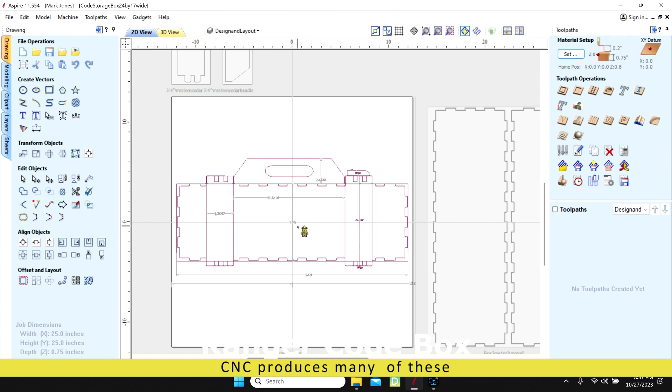I'm making a box to house some signs that I'm making for our Ranger code. This is the sides of the box. These are the ends of the box. I'll make two of these, which will give me the four sides.

They're both, each one's a little bit different, and then these two ends are the same. I could have just duplicated it, but I'll basically cut that twice and then cut this once, and that will give me all six sides to my box.

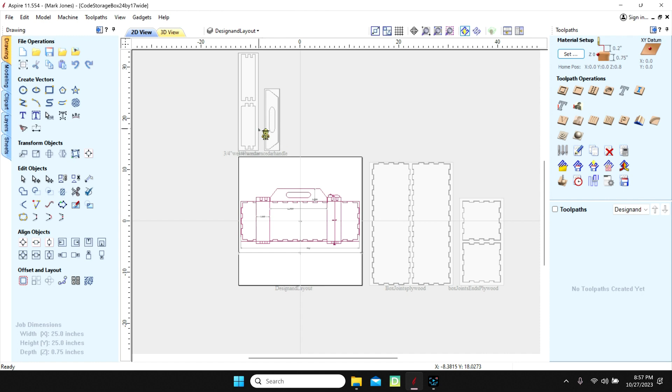This is the handle up here, and then these are the skids that go around the box. So we'll zoom in here a little bit on the box.

It's basically 24 inches long. The signs themselves are right at 23 inches, so that gives me about a half inch of space inside the box. And the signs are like 7¼ inches wide, so it gives me about 3/4 of an inch inside the box on that other dimension.

These are the skids. They're basically box jointed and they fit in there approximately 3 inches from the end. And then this is a handle. It's about 2.5 inches tall and it's right at 11 and just under 12 inches, about 11.5 inches long. This is made out of cedar fence pickets, and they're box jointed.

And this is a 1/4 inch plywood. It's underlayment plywood, and it's designed to be cut right here at the end after it's glued together. And these are all box joints, 1 inch box joints all the way around. So it's a pretty strong box.

Then I have two screws that come up from the bottom into the handle, and this makes the skid so that it's not sitting on the ground.

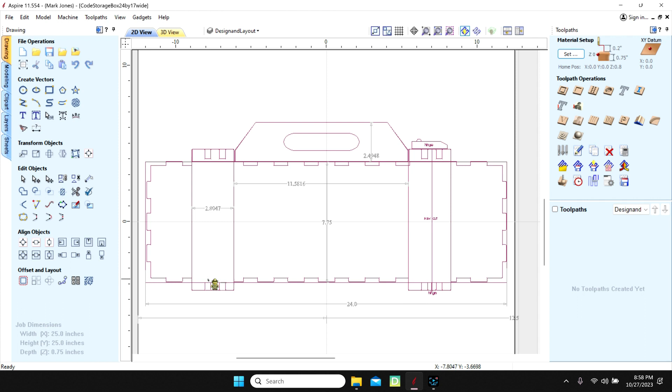And then this is a hinge in here. The hinge is so that this part goes down, and then there's a hasp at the top of it. Right up here at the top, it has a little hasp that locks the two together. And the handle's centered, so it does a good job.

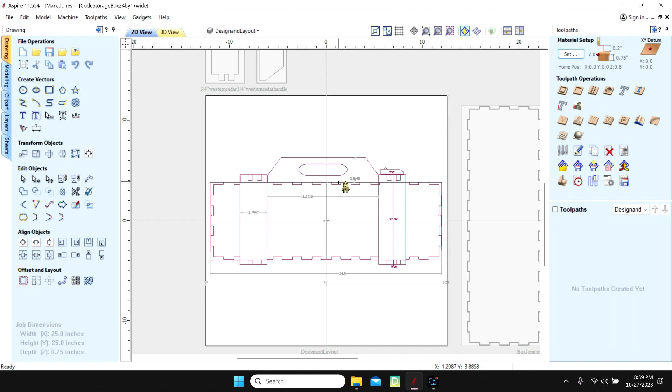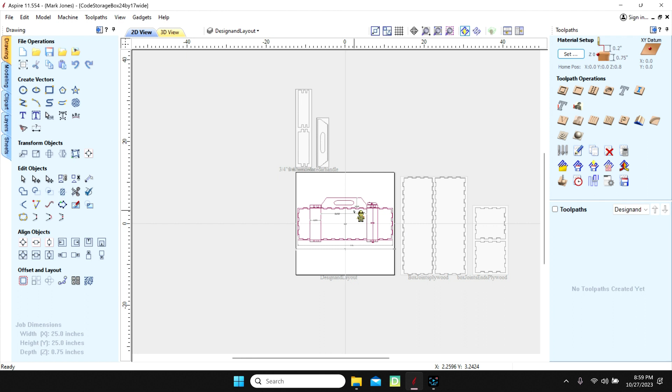I made two of these boxes now, and I've kind of taken this and set it up where I can create more of these. I do a frontiersman camping fellowship, and I have a lot of gear that's 1800 style gear. So the stakes, all kinds of different things, lanterns can go into boxes like this, and that'll keep them from getting tore up, getting gear from being broken.

Anyway, that's what we're doing with this, and having fun with it.

All right, Ranger code storage box, 24 by 17 inches wide. I've been making some Ranger code signs, and I wanted a box to store them in. And basically what I did is I used the box creator, and I had it make a box.

That created all these right here, plus a couple more. And I've learned a long time ago with the box creator, all you need is one of each, and then you can just carve it again. So that makes it easy.

Then these are the ends, which I could have just put one and carved it again twice, but it was about on the same piece of material. So that worked out fine.

Then over here, I had some skids that would wrap around this box, and they would wrap around all four sides of this. They'd be about 3 inches from the ends, and that would allow that to set up off the ground if it was wet.

And then in the middle of these skids, I would cut the end of the box off about right in here on the table saw, all the way through all four of these little box joints. And that would allow me to put hinges and a hasp on there so that the end of the box would open up. It looks kind of like a top hat.

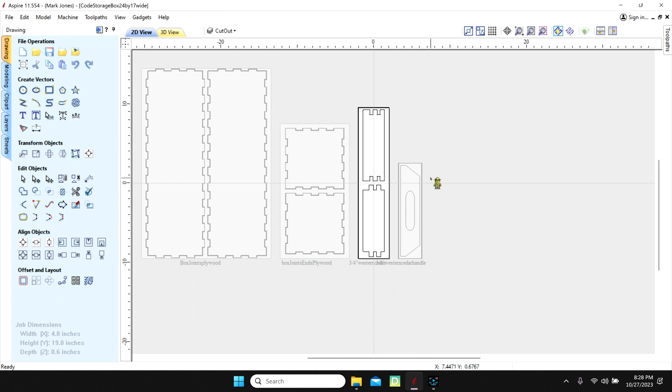And in the process I made this handle, and the handle just has the whole slot, and that all fits in there. But with my material, I created jigs out of 1/4 inch plywood to put all these pieces in so that I could reproduce them.

And the jigs, you just cut your material the width of the board right here, and then the jig's just a little bit bigger than this. What that does is that gives you where you can cut a bunch of raw boards of this size, and they just fit down inside your 1/4 inch, and then you can attach it down, but that will lock it all up so you can either flip it or whatever you want to.

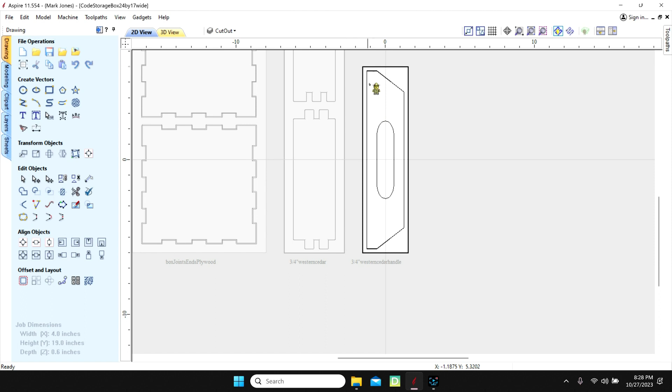So that works out real well. Same went with these box joints on this. Basically, after I did the box joint, I had to cut off the ends of it, or the little teeth that are on the bottom, and did that.

I had originally had this file tiled, where I would tile these all on about an 8-foot board. The box creator gadget was seeming to have some interference with that, especially when I added the sheets to it. Sometimes when I was doing the tool paths and using the box gadget, it would take some of the tool paths from this file right here and put them on this one, and set them over here. Either way, it would create them, so I was having some issues with that even when I got out of the program and back into it.

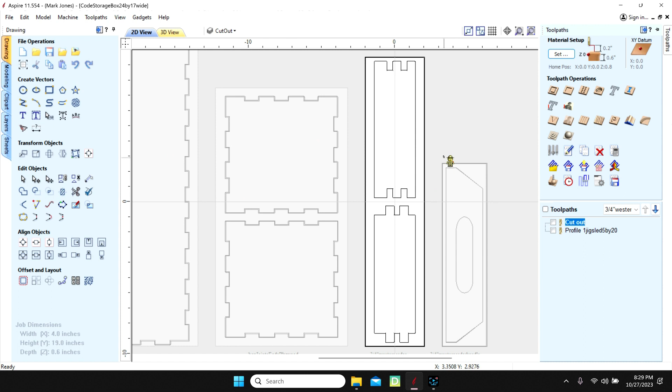But that was with the tiling tool path turned on right over here, and this file, after about the third or fourth time, I think it cleared its throat and started behaving properly. But when it went to set size, it didn't remember the settings of the sheets. So if you go in here and click up there and do your material and sheet size in 2D view or in the drawing mode, and come up here and look at that, it still shows it as various. It's kind of a funny deal.

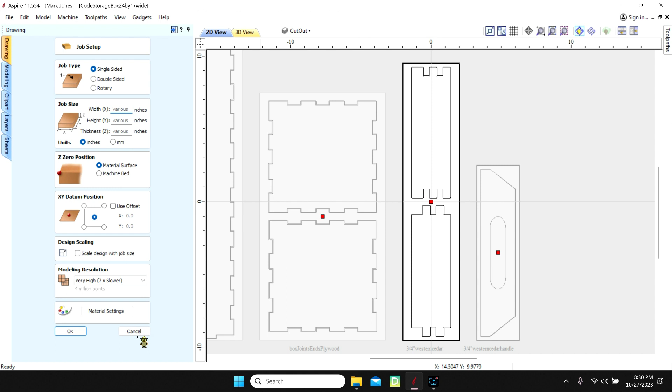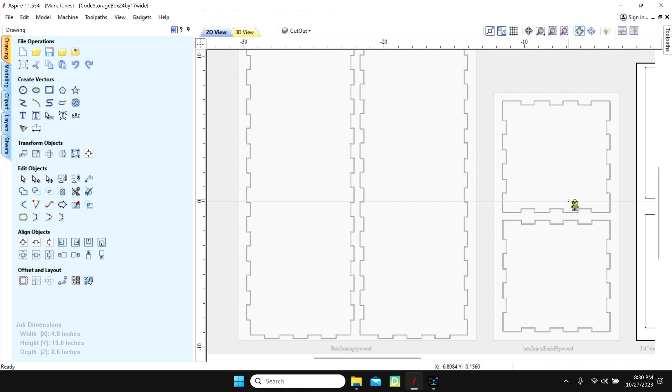When I was trying to do the box creator, it would kind of leave me hanging out there with that. For that very reason, I changed the datum - the box creator likes to have the datum down here in the corner, and once I changed that, it changed it on all the sheets. So the datum kind of needs to be set, in my opinion, for each sheet, because sometimes you wouldn't want the datum up here in the middle - sometimes you want it down on the lower left. But anyway, that's some things I've been working through and getting through on this thing.

My tool paths were basically pretty simple. Just cut out the box joints, then cut out the handle, and then I would run a V groove on it. Let's look at the tool paths on that one. So there's your handhold, then there's the jig, and then there's your handle in here, and then the V bit went and chamfered all the edges.

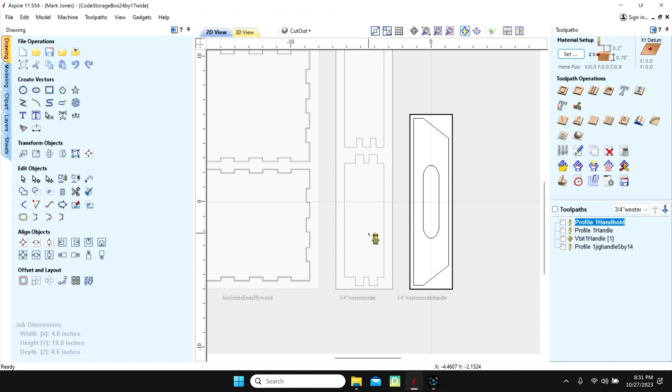So I basically did it like a two-sided machining on this. I just flipped it end for end, and then ran it again, keeping this base here the same, so then it chamfered these edges, and it worked. So that was kind of what we were doing. Made a nice box, and you'll see the picture of that here in just a little bit.

Okay, this is the Ranger Code. Alert, clean, honest, courageous, that kind of a thing.

This is wide fence pickets, Western cedar. Got them for Lowe's, about $6 for a 6-foot piece. I can make 3 signs out of one piece. So this is all right at $2 or so in material.

And got a little paint in it and a little bit of Helmsman spray varnish in there and some CNC time. These take about 30 minutes per sign to route out, not much time, other than loading the piece up and doing something else in the shop and then letting it rip.

I sprayed this with Helmsman, let it dry for about an hour, and then I went over it with mineral spirits, just wiped it wet, sprayed it with the black spray paint, some of that Walmart cheapy stuff that we use for like derbies, and it's indoor outdoor, and then I seal both sides of it.

I'm letting this dry, then I'll seal it one more time with the Helmsman, and then I'll put a piece of paracord in here, probably some red or black or blue, whatever, to put them in there, and that will be what they'll hang on the signs. This will be a stevedore knot up here in these holes.

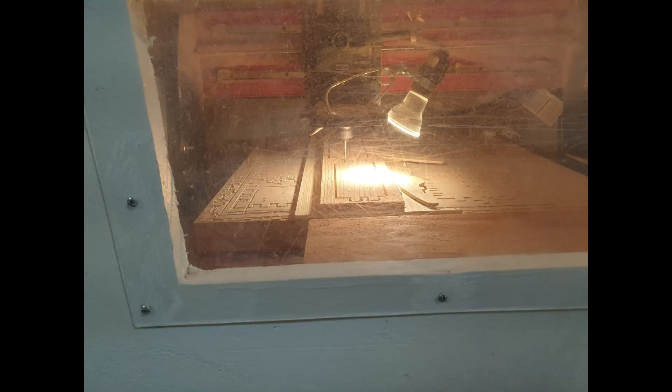That's what I'm making over there is some skids that go around here, around it. I'm just making box joints on the edges and going with that. I built out some handles last night and just made a jig to make them up. So I'm probably going to make quite a few of these boxes—tent stakes, just different things, lantern boxes, things like that. So that's what I'm looking at.

Alright, so I've cut 8 more of these signs. I made this little jig, made a jig template in V-carve with my rough stock fits down into. I just screwed it down. I'm using centers off of my board, so if I ever lose it, I can just go right back corner to corner. And I've got 8 more of these signs to cut out.